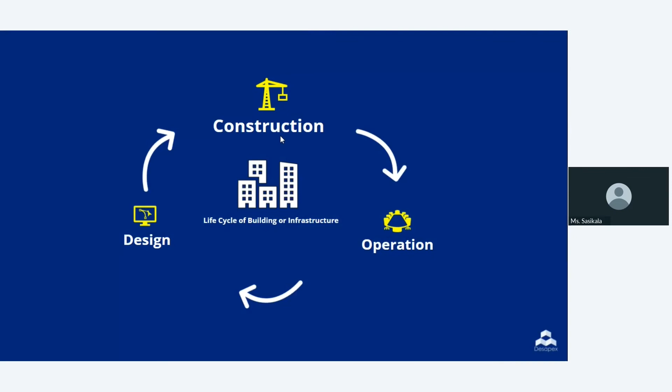Desapex is creating this sustainable built environment by enabling digital adoption and integration of technologies for target value design. We are headquartered at the Silicon Valley of India, that is Bangalore.

We also operate from major cities - Chennai, Hyderabad, and Hubli - and we are serving all over India. We also have customers across the globe.

There can be miscommunication between stakeholders and designers, and 2D drawings can also cause miscommunication between stakeholders, making visualization such as animation and rendering very difficult.

Running a project without good project management leads to greater expenditure, often leading to unnecessary burden on the budget. If the facility data is not properly transferred to the client at the time of handover, then the data will be lost with the passage of time, causing difficulties for retrofitting and renovation in future. Lack of standards and regulations might result in tragedies like structure collapse, fire breakout, etc.

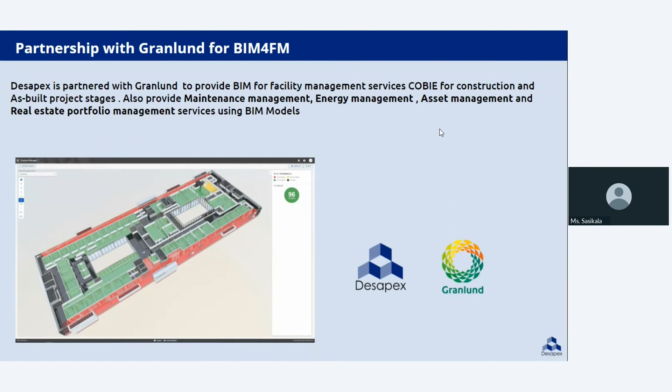We are partnered with a Finnish company called Granlund to provide solutions like BIM for facility management, in which we provide maintenance management, asset management, energy management, and also real estate portfolio management services using the BIM model. For that, we have a special software called Granlund Manager.

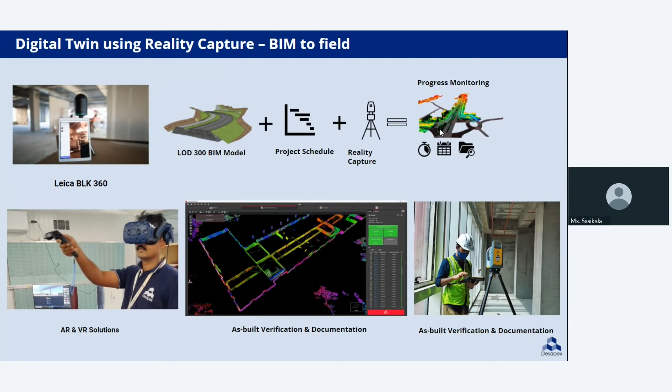This is a digital twin using reality capture. A digital twin is the virtual replica of the project. Here we build an as-built model using laser scanning technology - we develop the BIM model using reality capture data, and then the models can be further used for as-built verification and documentation, and also for construction progress monitoring.

I feel very proud to say that we are the first company in the world and the only company in India to have this kite mark from the British Standard Institute, which is a global standard for BIM — ISO 19650 Part 1 and Part 2. So this is all about our Desapex portfolio.

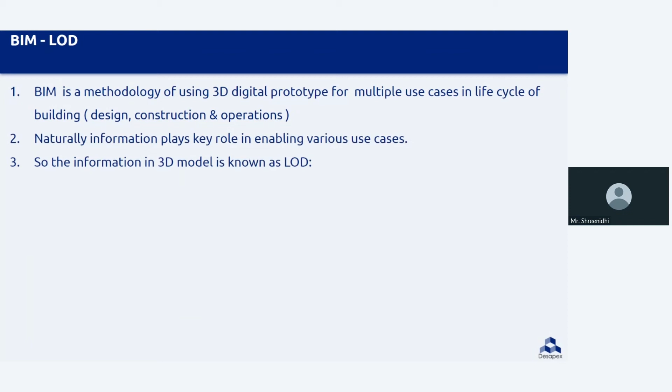Naturally, when we're talking about information-rich models, information plays a very important role. The information in these 3D models is collectively known as LOD, right? LOD is basically level of detail or level of development, as it's popularly known. These 3D models have two kinds of information in them.

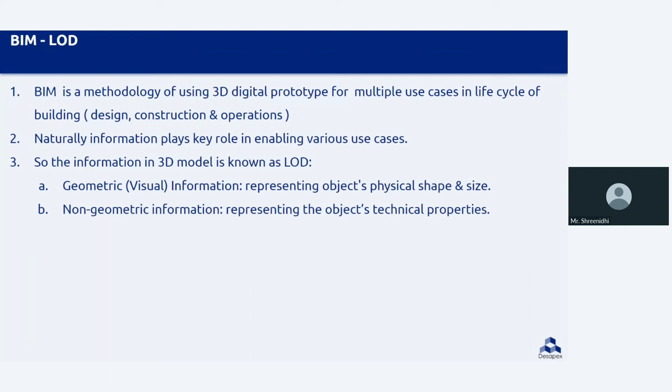One is geometric information, or visual information, which represents the object's physical shape, size, color, etc. And there is non-geometric information, which represents more of the attribute data or technical properties of that particular 3D object, which is collectively known as LOD, or level of development.

Let's discuss this with an example. If there's a chair and we want to represent it in 3D, we need to give two kinds of information into that 3D object so it looks similar to the chair. One is the geometric details, the dimensions, the visual appearance, what kind of legs it has, the cushion thickness, all this is geometric or visual information. Another important part of a 3D information model is the non-geometric data embedded into it.

This could be the manufacturer details of the chair, its carbon footprint, its sustainability score, its weight — all this kind of information can be categorized as non-geometric data. So geometric data and non-geometric data collectively will be called LOD.

Similarly, for people from a services background, whenever LOD is associated, we can understand it by taking an AHU, an air handling unit, which supplies cold or hot air into a room, as an example. The physical appearance, shape, and size can be called geometric information, and the non-geometric information would be, let's say, the airflow and the noise level it produces. All this information, when embedded into these 3D models collectively, is called level of detail.

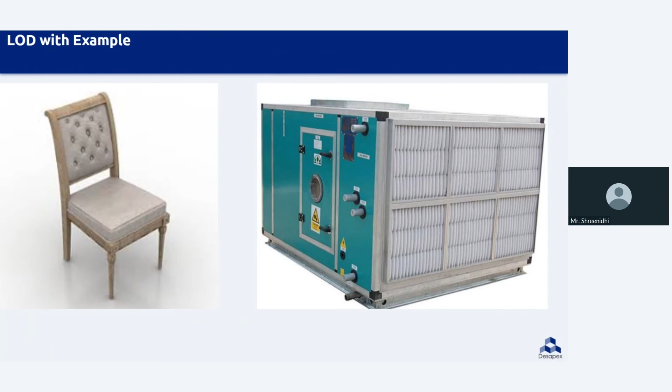Another thing we want to discuss and contextualize today is LOD. When we talk about LOD, there is terminology called level of development and level of detail. I think it's not that important whether we use level of development or level of detail, but there is a difference we need to understand. Level of detail is what has gone into the element as an input, whereas level of development is the development which has happened for that particular element. So on a high level, LOD as level of detail is defined as the requirement, and level of development is what has come as a reliable output once these details have gone into that 3D object.

So let us define now the LODs itself, as many people in this industry may be seeing LOD 100, 200 day to day. But let us define, because industry uses this LOD 100, 200 kind of terminology, where LOD 200 is said to represent more information compared to LOD 100 stage 3D models. When we talk about LOD 100, this is a very nascent stage. In this table, what I've tried to show is the very high level definition, and we have relied on BIM forum for the definition, and typically in what project stage these models are utilized.

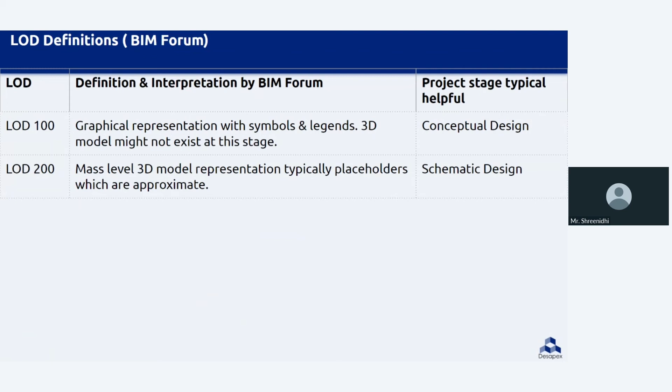Please note that when we talk about LOD 100, there may not even be a 3D model. There could be just graphical representation on a very high level, typically used in very early conceptual designing. When we talk about LOD 200, yes, there could be some level of 3D models, but not necessarily for all elements. There will be some kind of placeholders indicating what size and shape might be occupied in that particular area, when the schematic design is completed.

Very popular is LOD 300, where typically it is utilized at the end of design development phase, where in the 3D model, whatever is being developed, the accurate shape, size, and location of that 3D element has to be represented, such that we should be able to directly measure the elements from the model itself without referring to the non-geometrical information. Then LOD 350 is basically the LOD 300 model itself, but with additional information of maybe hanging details or supports, which will help in interdisciplinary coordination. So an LOD 300 model coordinated with other disciplines can be broadly called LOD 350 stage. This will be basically at the end of the design documentation stage.

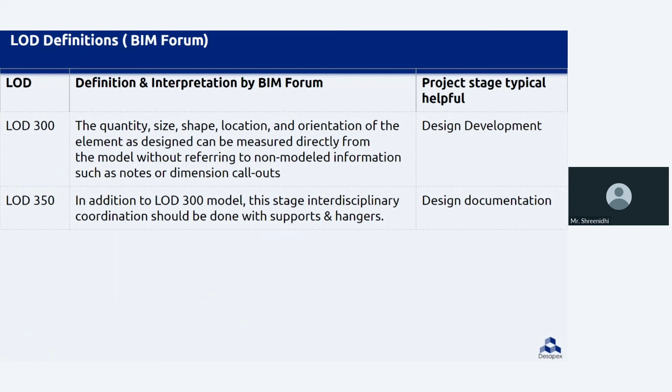One thing I want to highlight is that many times when we talk about the design development stage, though the design development stage would have started, we will be having LOD 300 model only at the end of design development phase. We need to understand that these models go through a lot of iterations, a lot of development. So at any given point in time, LOD 300 model may not be available, and we need to understand that by end of design development phase, what we will be having is an LOD 300 kind of model. When it is coordinated between the other services, then we should be able to call that LOD 350 model.

So then LOD 400 model - we saw some people from construction background over here. Once this LOD 350 model, basically at the end of design development phase, is enriched with fabrication details or installation details with specific manufacturer geometries... Because in construction industry, at the design development phase, we may be looking at 2 to 3 different manufacturers for a particular element. If we take an example of a chair, we may be looking at 2 to 3 alternatives which are okay at the design development phase. But at this stage, the client and project managers, due to project budget, timeline, availability, or technical superiority, might go with one of the manufacturers.

So manufacturer specific models have to be put into the 3D model to be named as LOD 400 model. This typically happens in the construction documentation phase. Another point is that there is no necessity to go for LOD 400 if there is no use case defined or no one using these models. What I see is there's always a parallel track where construction is happening on site using 2D drawings, but still there's a team working on the models and keeping them updated without having any use cases. I think we should understand that unless we have a use case, we don't need to develop these 3D models.

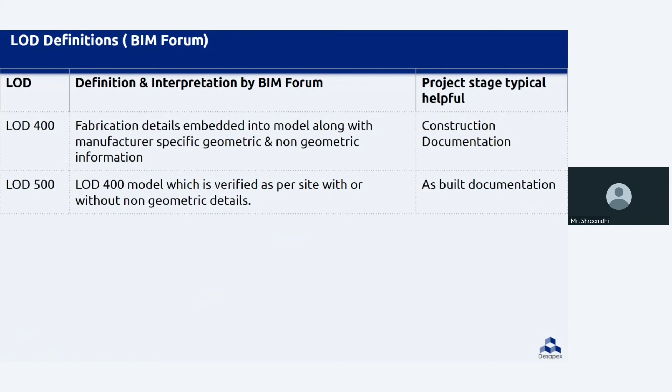So it is very important that in the beginning phases of the project, we have these kinds of discussions with the client and other stakeholders on how these models will be utilized at various stages, and what use cases will be derived out of the 3D model, so that it helps in the development and usage of these models.

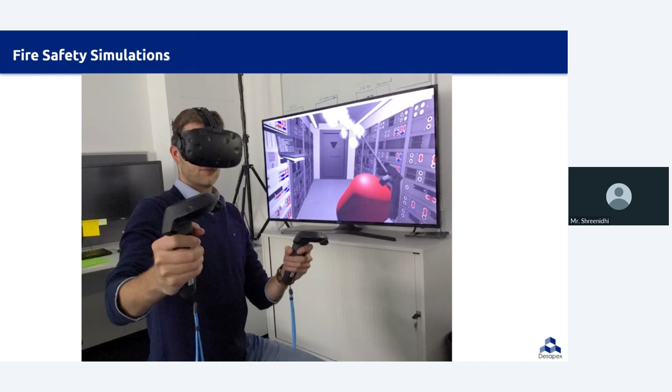So what we can do is use these 3D models during the design development phase itself, and then a safety inspector or project managers can ensure there is enough safety with respect to fire evacuation. These simulations can be documented as proof that we have taken care of all these things, and these models can later be utilized for building occupiers, enabling adequate or enhanced fire safety use cases.

Another topic dear to me is universal accessibility. Many times we go to today's buildings and see people who are differently abled, or elderly people who don't have the same physical strength as youngsters. Today they cannot interact with buildings the same way others do. It's important that our buildings have universal accessibility, and most corporates take this seriously, as do public facilities like airports or metros, which emphasize accommodating everybody.

But during design, none of us, at least in the projects we're involved in and the ecosystem we live in, use 3D models to benchmark and see how a blind person would interact with this space or design. Will he be able to navigate through the signages provided? Can we add additional signages or alarms or sound-based systems to notify them? Yes, all such things can be simulated using 3D models.